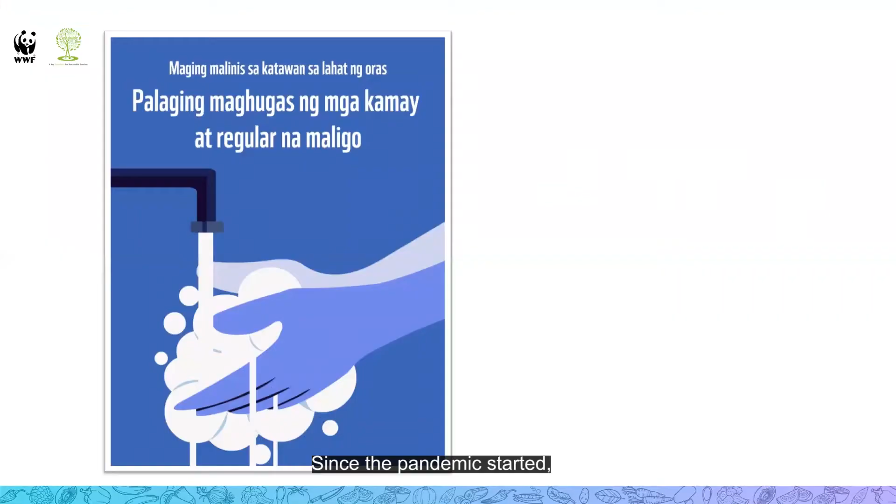Since the pandemic started, we've been receiving a lot of advice from our experts to keep washing our hands. And this is very important because it's our primary defense against spreading the disease, COVID-19.

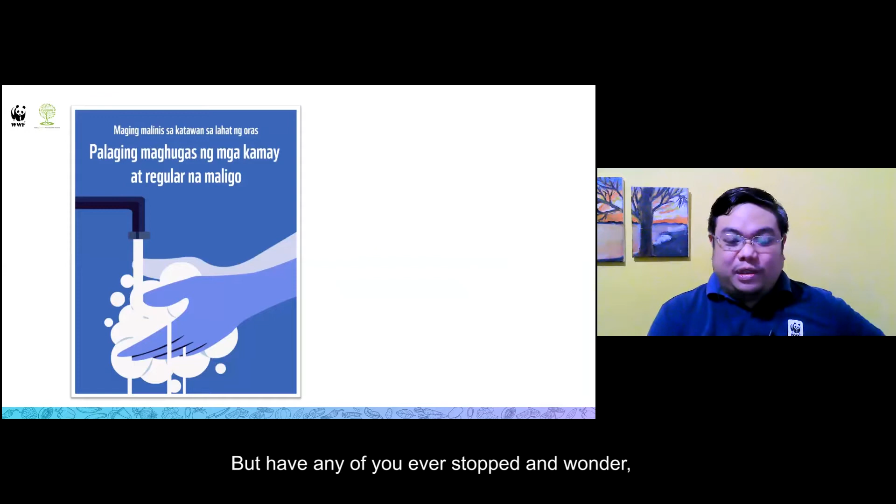But have any of you ever stopped and wondered how much water we're actually using in that 20 seconds of washing our hands? In an experiment at our house during the water crisis in 2018, I measured how much water we'll be using if we keep the water running as we lather our hands with soap as prescribed by our experts. Within 20 seconds, we could easily use up more than 1.5 liters of water, and that's water generally wasted while we're soaping our hands and just letting the faucet flow.

So that's how much water we use in 20 seconds. And take note that this was during the water crisis in Metro Manila in 2018, where we had a lot less pressure than what we used to have before the crisis.

But then again, have any of you ever wondered where the water is coming from? When we ask people in Metro Manila, they kept saying that they get their water from the faucet. Where do you get your water? It's gripo, it's a faucet.

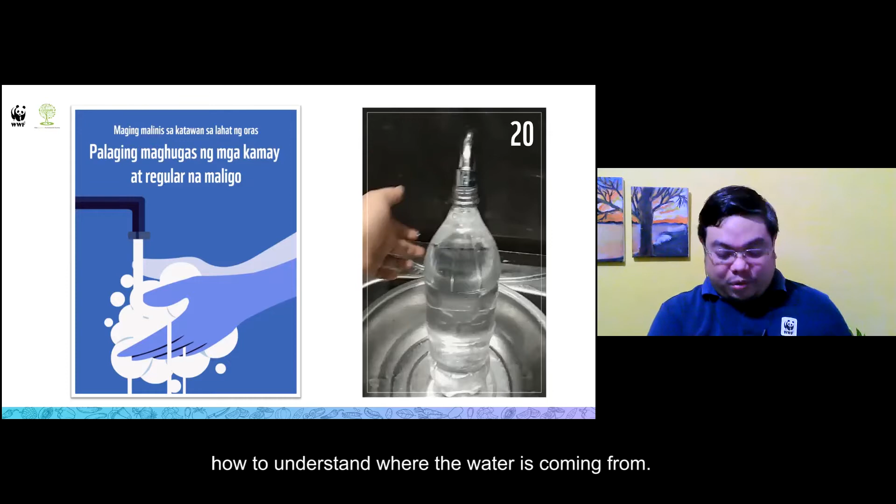And that's quite understandable for many people who live in the cities who don't really bother to understand where the water is coming from. But in general, water does not come from the faucet. In fact, it comes from somewhere way, way farther than the faucet.

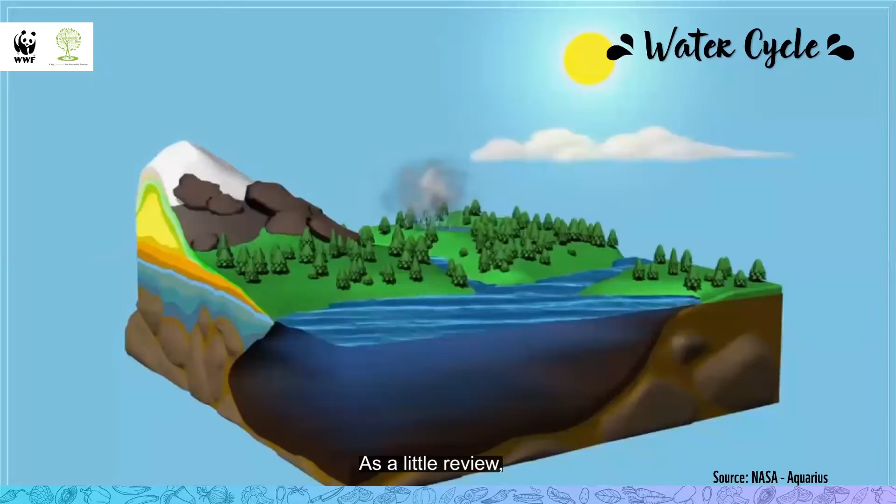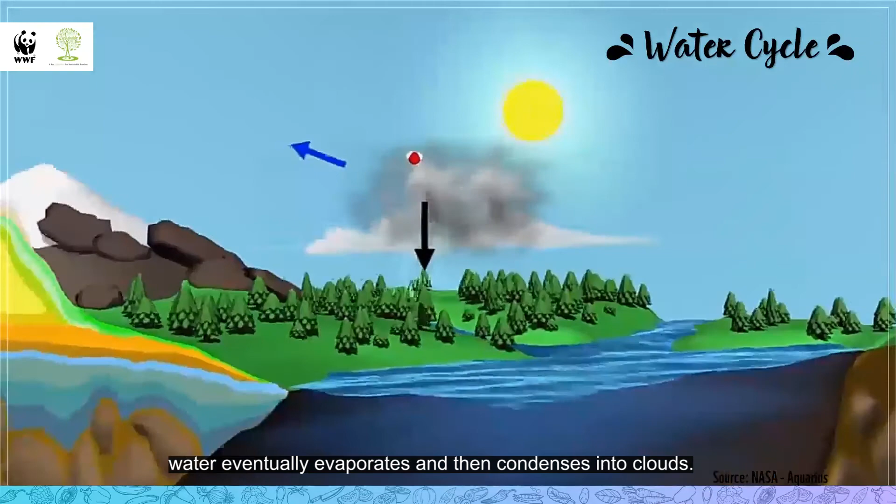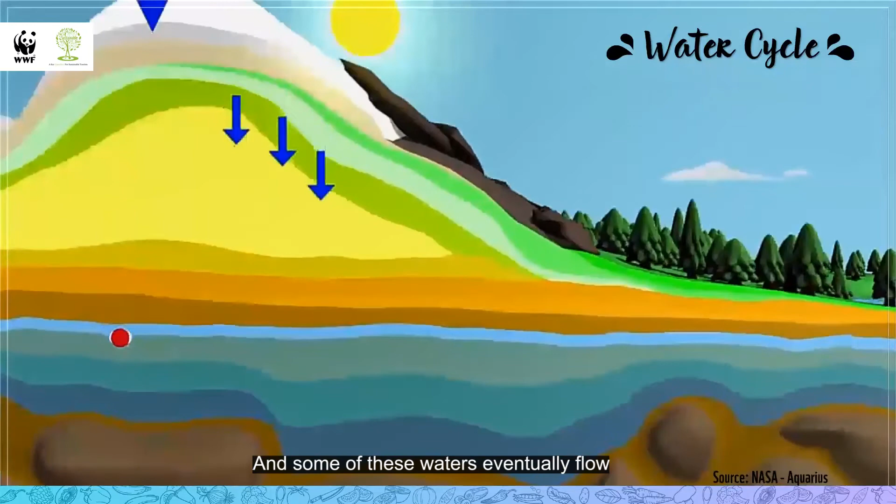As a little review, this is the water cycle as discussed by NASA. Because of the heat of the sun, which heats up our oceans and water bodies, water eventually evaporates and then condenses into clouds. As the clouds get heavier, they eventually fall back to Earth as snow, rain, or sleet. Some of this water eventually flows through the rocks and the soil and ends up underground in the water table, which becomes groundwater.

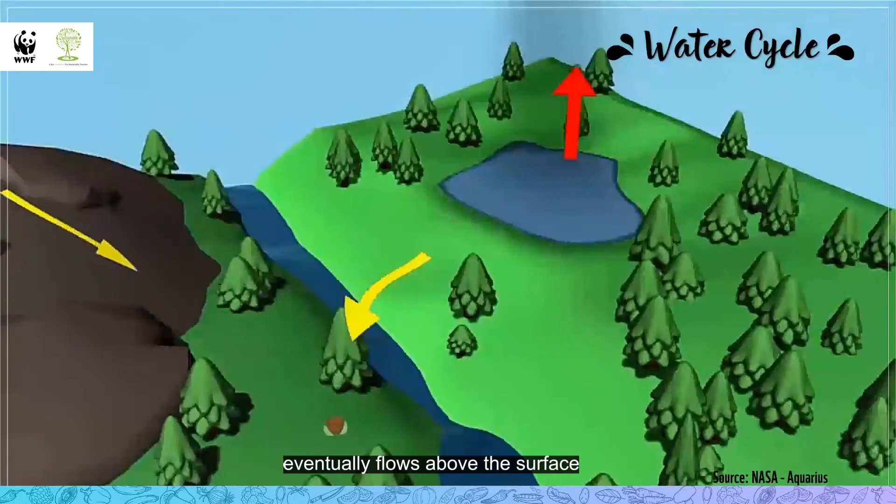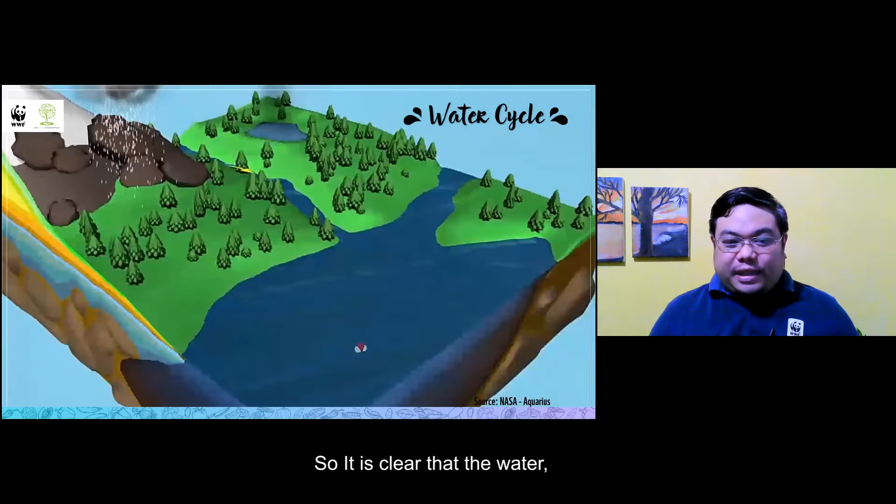But then again, some of the water eventually flows above the surface, which is then called surface water, collected in our lakes or rivers, which eventually flow back out into the sea again, completing the cycle. So it's clear that water in general is coming from nature because of the water cycle, and not just because of a faucet.

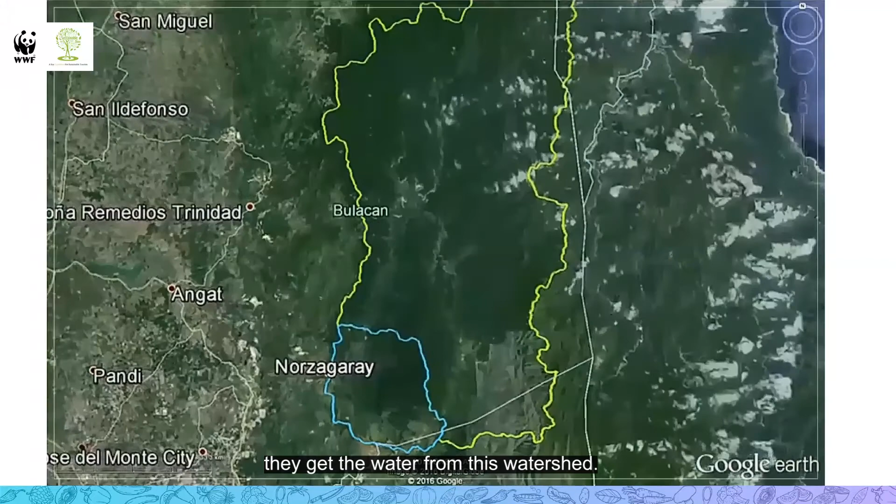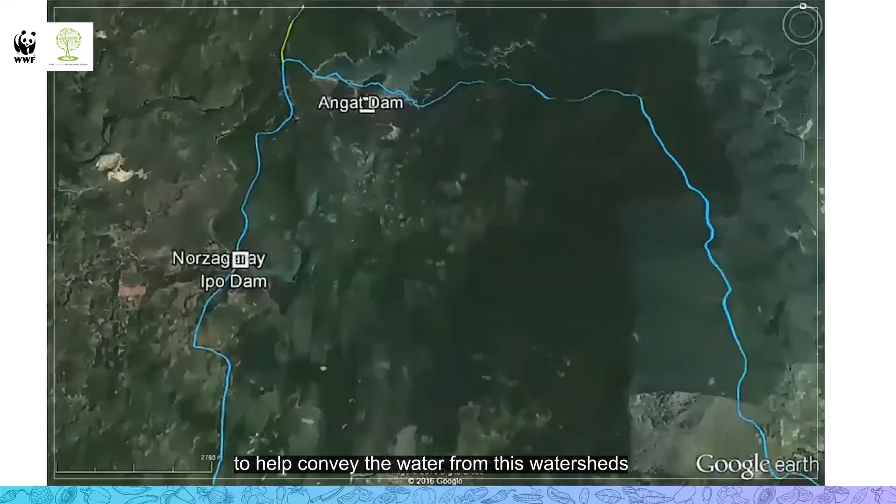More specifically, for Metro Manila, about 40 kilometers northeast of Metro Manila, they get the water from this watershed: the Angat and the Ipo Watershed. In the Ipo Watershed in particular are two dams which were created to help convey the water from these watersheds to where we need them the most.

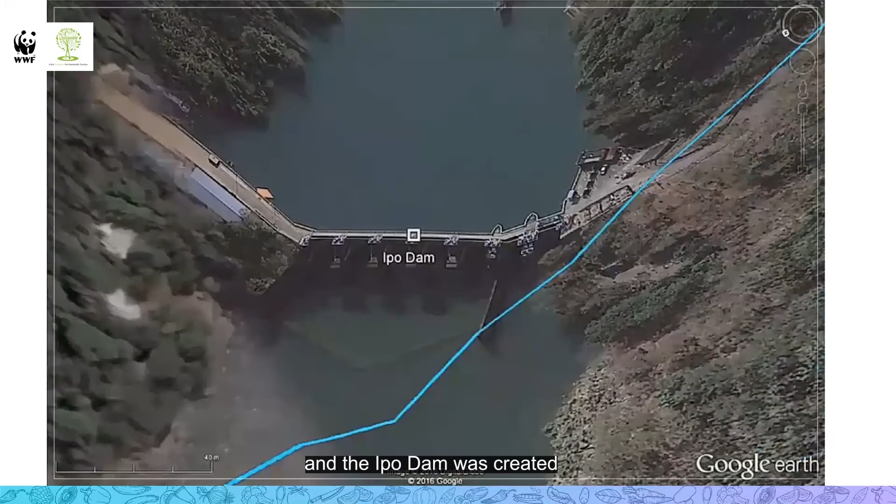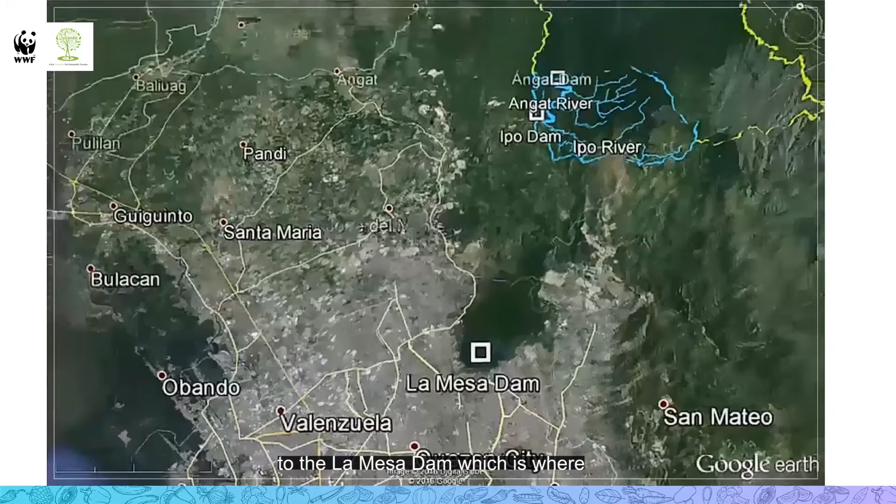The Angat Dam was created as a hydropower dam, and the Ipo Dam was created specifically to provide water for Metro Manila. Now Metro Manila gets 96% of its water from the Ipo Dam, which is then channeled to the La Mesa Dam, where our concessionaires, Manila Water and Maynilad, eventually distribute it to the population.

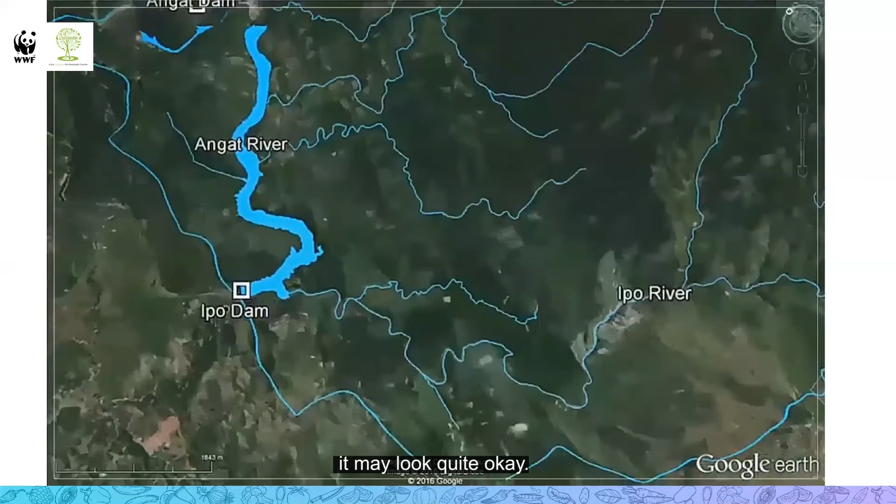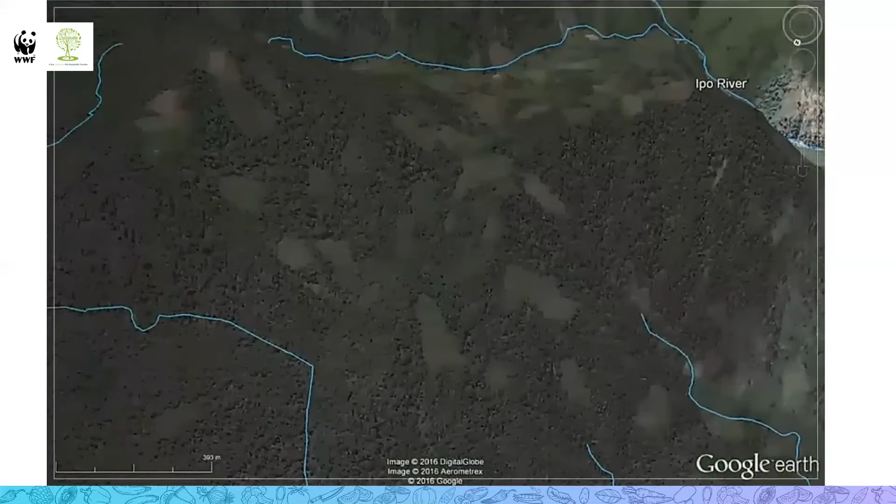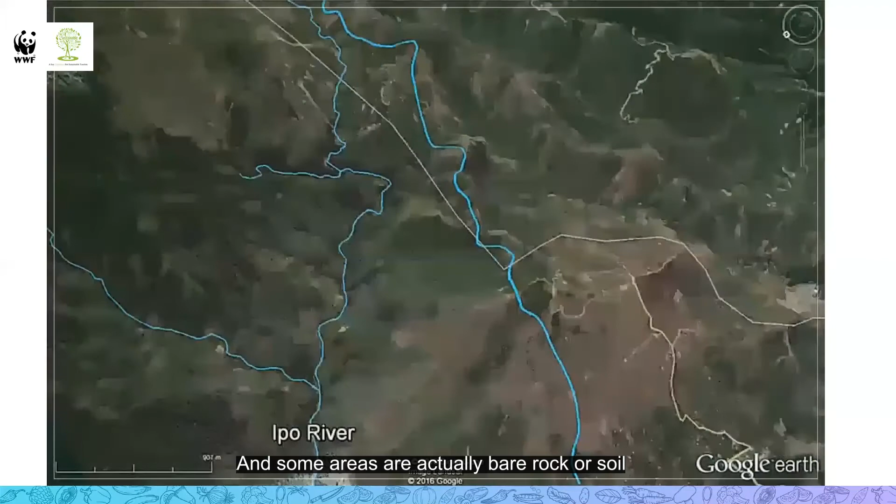So when you look at the Ipo watershed from a distance, it may look quite okay, it looks green. But when we go down to the site, we could see that a lot of the areas are not actually forests, but have been converted into farms. Some even have marks of previous illegal activities such as kaingin and other illegal timber poaching. And some areas are actually bare rock or soil because of years of overexploitation and degradation that has been going on in the watershed.

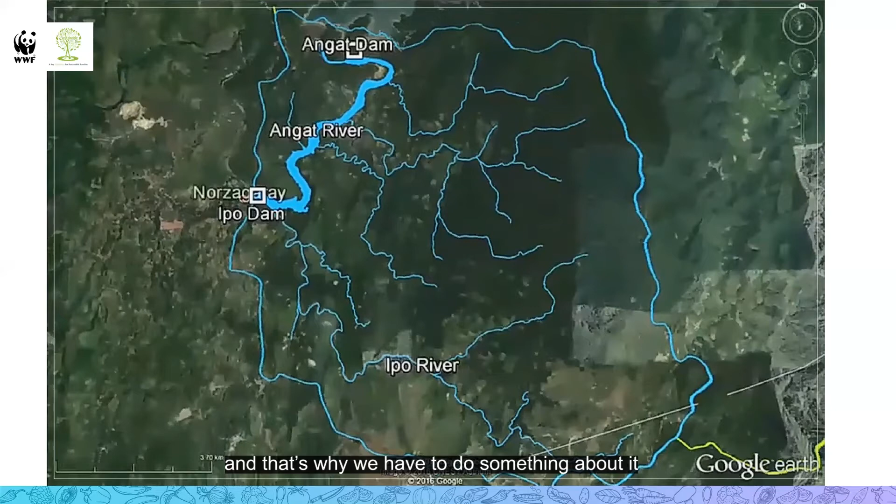So this is sort of a picture of the status of where our water comes from, and that's why we have to do something about it if we want water conveyed to where we are.

Now that we know that water actually comes from nature, we must also understand that it takes a lot for that water to be captured, eventually cleaned to our specific purposes. And take note that there's more than one use for water. Not all water needs to be potable or at a level that's safe for drinking. And then eventually it needs to be conveyed to where we need it the most.

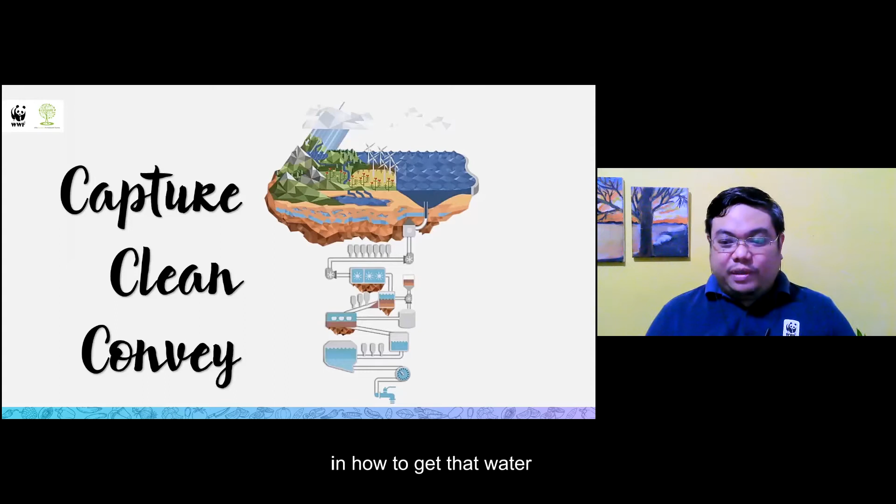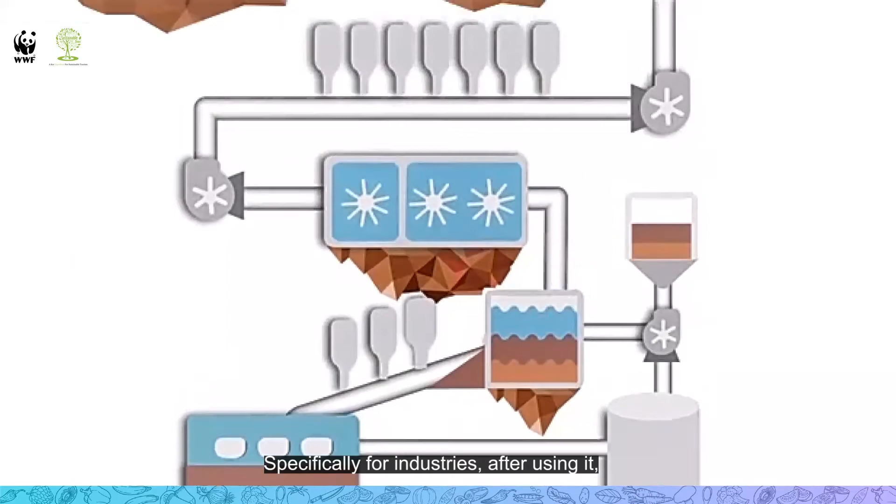This is why most people think that the faucet is the source of water, because every day when we turn on the faucet, we get the water. But we don't really think about the process involved in getting that water from nature to our faucets in our houses. And then again, after using it, we must always remember, specifically for industries, that after using it, it has to go through a similar process, maybe even a more intense process of cleaning before we put it back out into nature.

And this is the case for a lot of the tourism facilities, particularly in Boracay, where recently they were shut down due to the poor water quality in the area, which was basically mainly about most of the establishments not following this reverse process where you have to process the dirty water you use before you pump it out back into the sea or into the ground.

So when we talk about water management, we often just talk about the supply side. Oh no, we need more water. We have a crisis, we need more water. Sometimes these solutions will entail building large infrastructures that may hamper or do irreparable damage to the environment. And it's because we only focus on the supply side of the issue. But actually, we have to focus on both sides of the coin. It's both supply and demand.

So, in particular, at the height of the water crisis in Metro Manila, this was the average consumption for a typical middle class family in the eastern part of Metro Manila, which suffered the most at the 2019 water crisis in Metro Manila. And believe it or not, this is 200 liters.

Can you imagine that each individual in Metro Manila East Side, middle class and above, was using 200 liters per day per person? It may be hard to believe, but you can check your water bills if you're in Metro Manila. The average monthly consumption is about 30 cubic meters, so that's divided by 30 days, so that's 1 cubic meter per day.

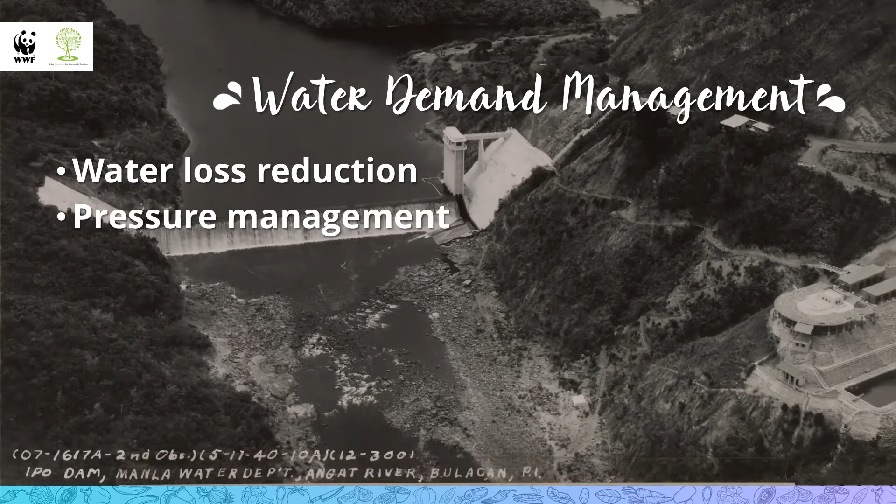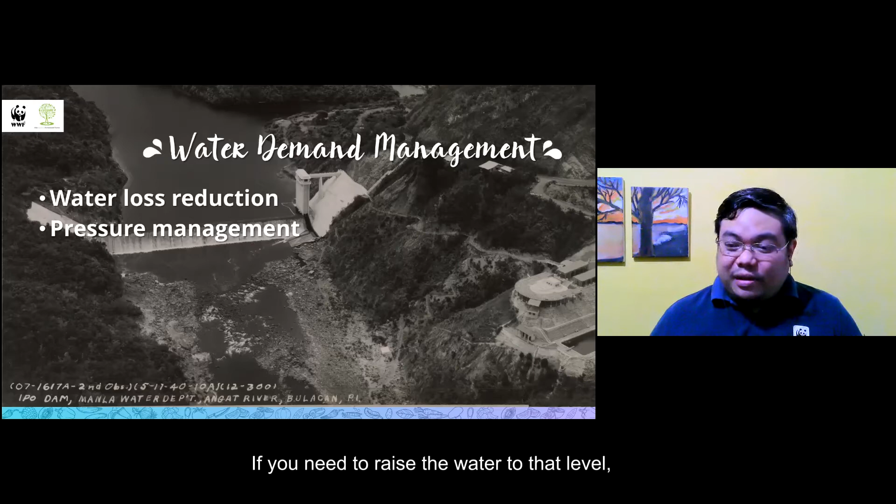The next is pressure management. The more pressure you use in the system, the more water flows out of that faucet per second. There are prescribed pressures for each system, but sanitation-wise, you have to maintain a certain pressure so you can avoid contaminants from entering the pipes in case there are leakages. This is dictated by law or by governing bodies in the area. But essentially, we don't need water from our system to reach the third or fourth floor without any additional pumping mechanism involved. If you need to raise the water to that level, you need a separate system pumping the water up and not rely on the general water system from the utility.

The next is water reuse. This is very simple: as much as possible, the water we use for some functions is reused for other purposes that do not require a very high water quality. For example, we can use it to water our green areas for irrigation.

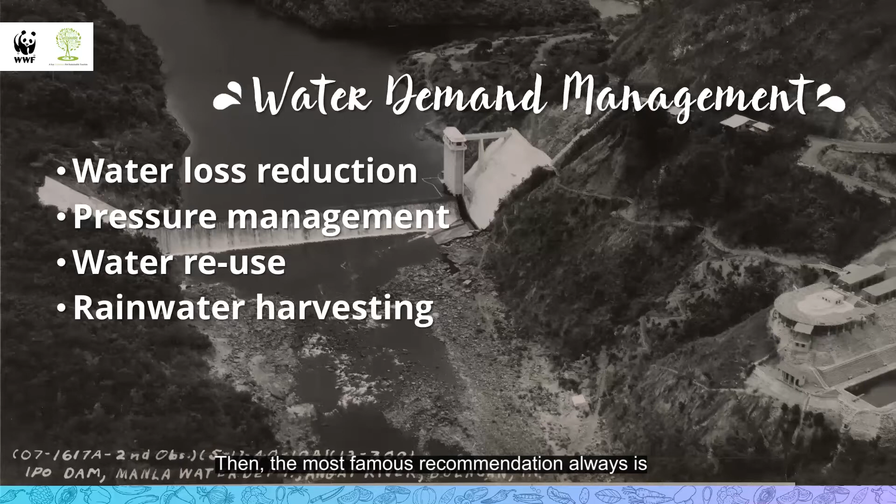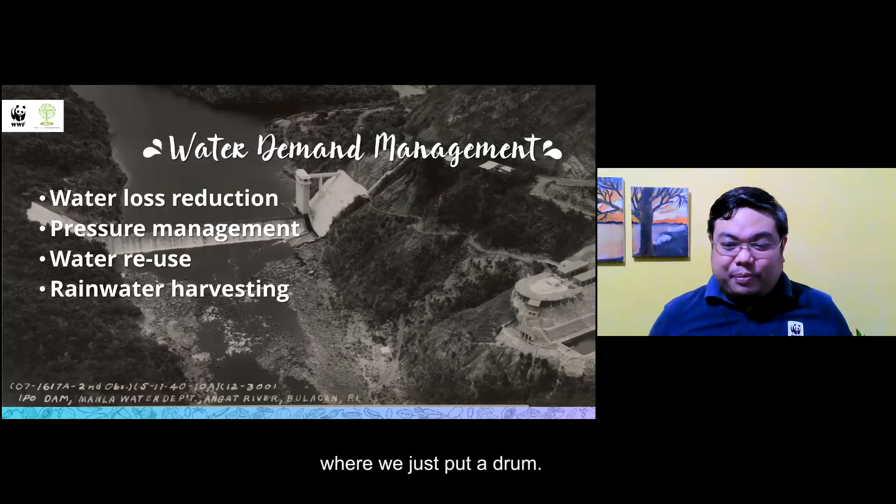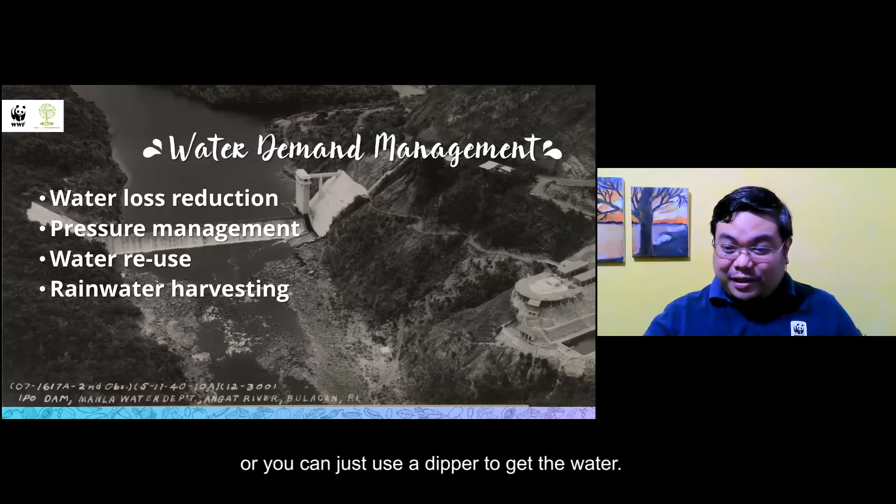Then the most famous recommendation is rainwater harvesting. It's free, and it's very cheap to integrate into a system. We even have a program working with public schools where we just put a drum, connect it to the gutter system of the building, put a cover, and add a faucet or even just a dipper to get the water. This can augment the water supply of the area, but it would depend on the size of your roof and the amount of water you're using in the facility. So this is more of an augmentation rather than a complete replacement.

The next is water efficient fixtures. I'll go into this a bit more later.

Then there's also water conservation. This is the part where we ask people to catch all the water they use for shampooing their hair, and then later use it to flush the toilet, or the water from the washing machine can be used to clean the car. These are some tips on how to conserve water. We've been talking about this a lot, but we have to figure out how much of that water is actually being saved in the long run.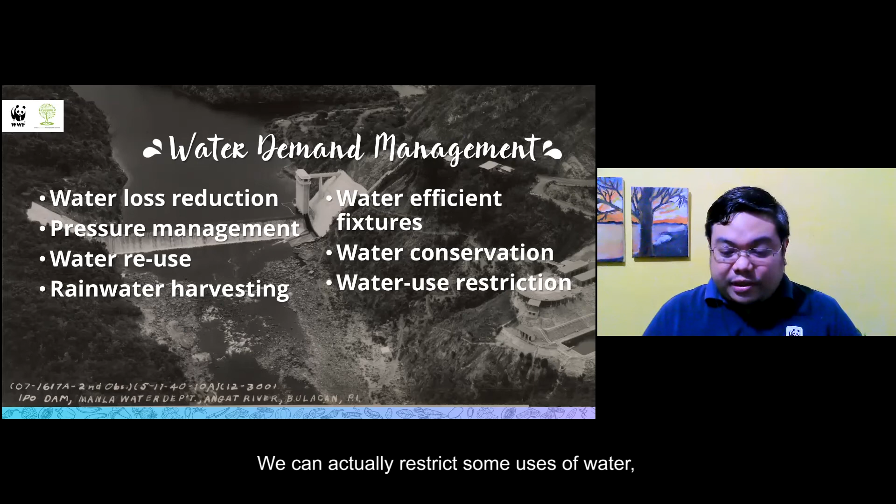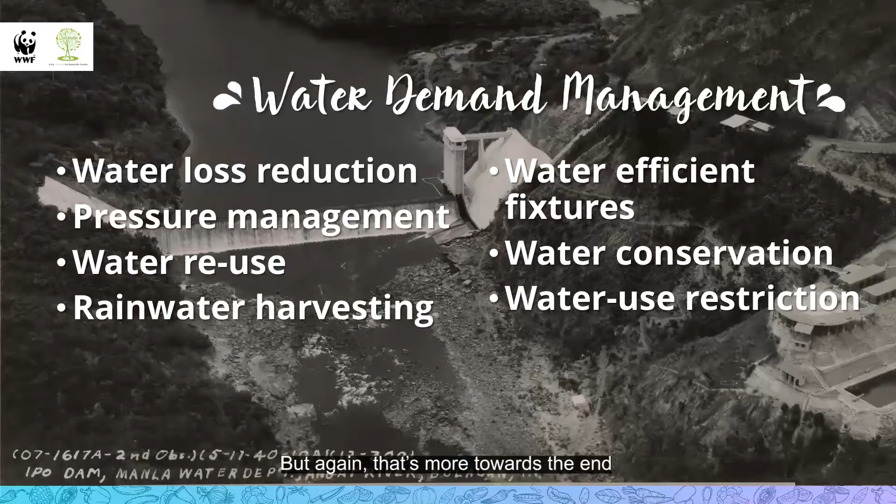Then we go to the last one, maybe the least popular: water use restriction. We can restrict some uses of water, specifically in areas where water is very scarce. For example, if there's a water crisis or the area is water stressed, maybe we can ban certain uses. Common examples from our discussions are swimming pools and golf courses in water stressed areas, so we can restrict those. But that's more towards the end of the spectrum of what we need to do on the side of water demand management.

For the tourism industry, one of the simplest recommendations for water use restriction related to water efficient fixtures is simply to avoid putting in a bathtub. I know a bathtub is required to get a 5-star rating, and a lot of people like having bathtubs or jacuzzis, but if you're in a water-stressed area, that's not really a reasonable facility because it wastes a lot of water. These are things that can be restricted depending on your assessment of your needs in the area.

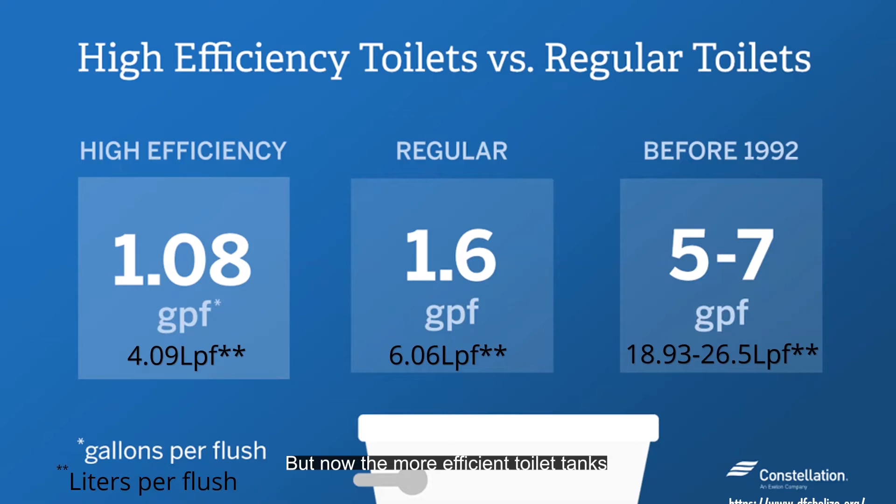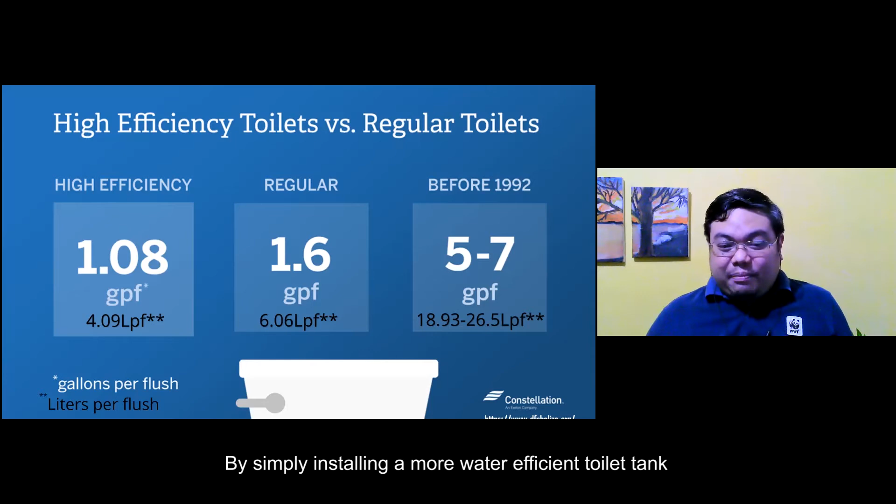If you're as old as me, we used to have the very big toilet tanks, wider than my shoulders, using about 18 liters per flush. But since 1992, we've had smaller versions down to 6 liters. Now, the more efficient toilet tanks can be about 4 liters per flush. So imagine, without changing the habit, each of your clients still pushes the plunger, but now they'll be using practically 1/5 the water by simply installing a more water efficient toilet tank or unit.

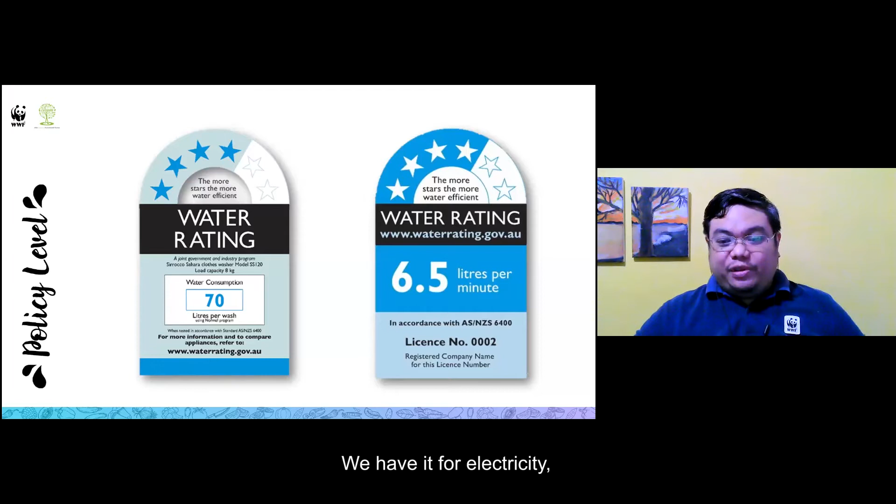Another tip is choosing better brands with better water efficiency. Unfortunately, in the Philippines, we don't have a system for rating how water-efficient an appliance is. We have it for electricity, called the EER, Energy Efficiency Rating, and we know the bigger the number, the better the savings. We may spend more initially, but save a lot more down the line because it uses less electricity. The funny thing is, when we buy a washing machine, we still look at the EER, but we don't look at the water rating.

How many liters of water is used per wash, per load of that washing machine? Or how about this faucet or shower head? How many liters flow out per minute? These are some simple changes you can make in choosing fixtures for your house or facility with regards to water. There's a group pushing for this now. But even without the rating, you can check online, because the same water fixtures we use here are sold in other countries that do require water ratings, so you can compare and choose the better product.

And now there's an even simpler solution where you can just install a nozzle which, depending on the model or design, can cut water usage by 98%. This is just a nozzle you can fit into your faucets, requiring very little infrastructure. You just plug it in, as long as it's compatible. By just adding this little attachment, you can save up to 98% of water, because we don't need the big flushing water in the first place.

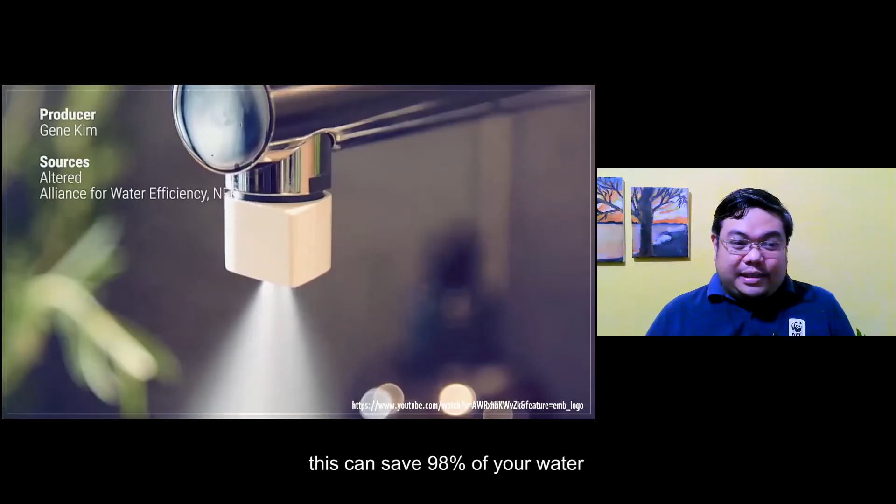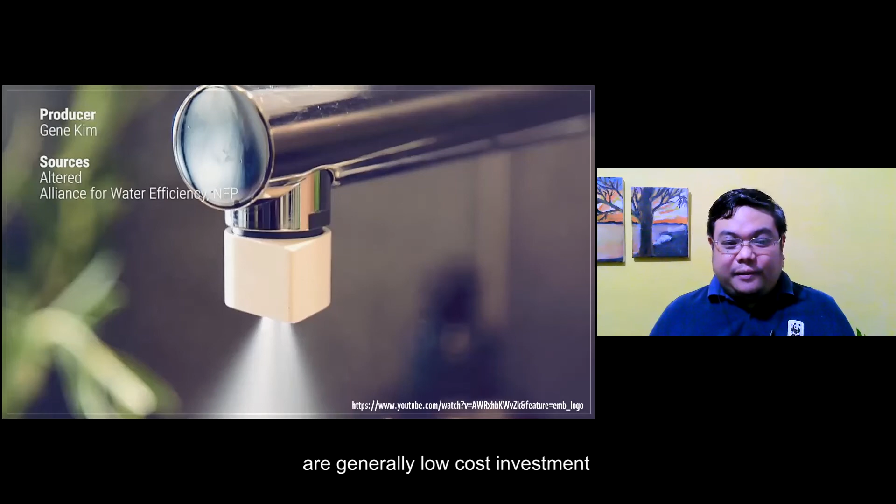This mode is free flowing, but when you use it in this mode, the water is actually sprayed or atomized and spread over a larger area, so you can use less water without changing the user's habit much. Unfortunately, this particular design isn't yet available here and is quite expensive. But if you compute it down the line, it can save 98% of your water from the faucet just by installing this small device. I'm not promoting this particular design, but these flow restrictors and atomizers that spread water over a larger area are generally low-cost investments for your kitchen, and are actually better for washing dishes because they cover a larger surface area.

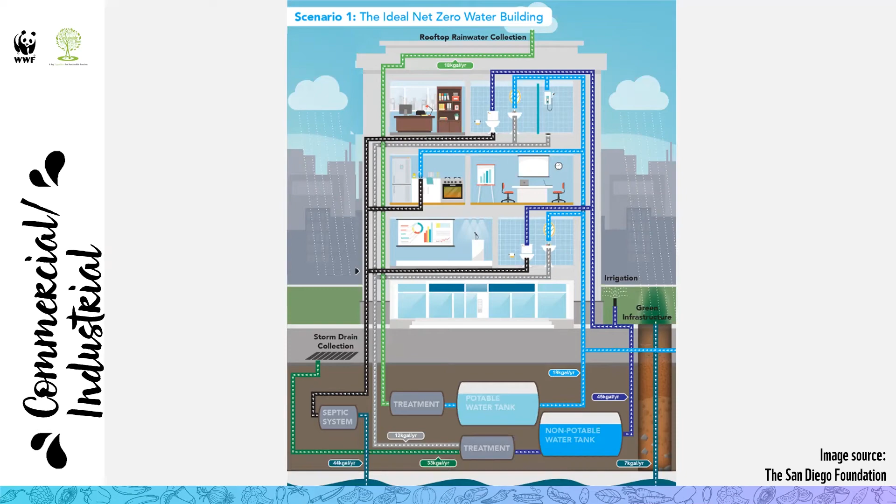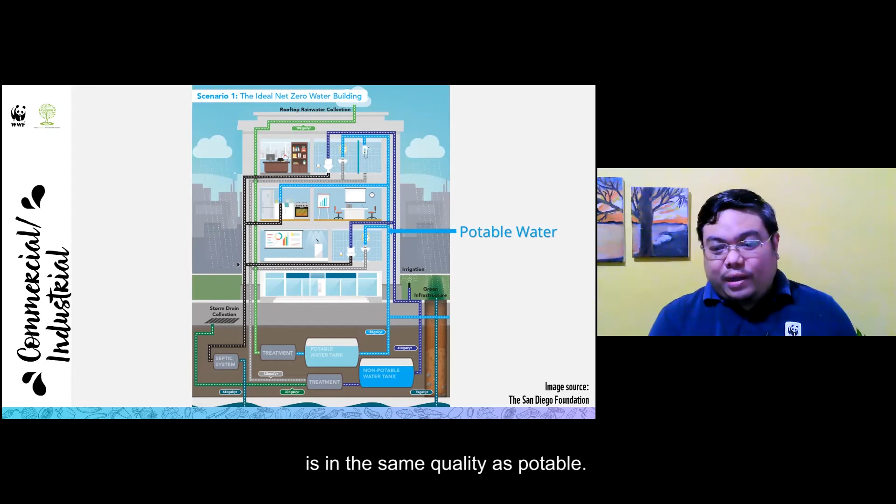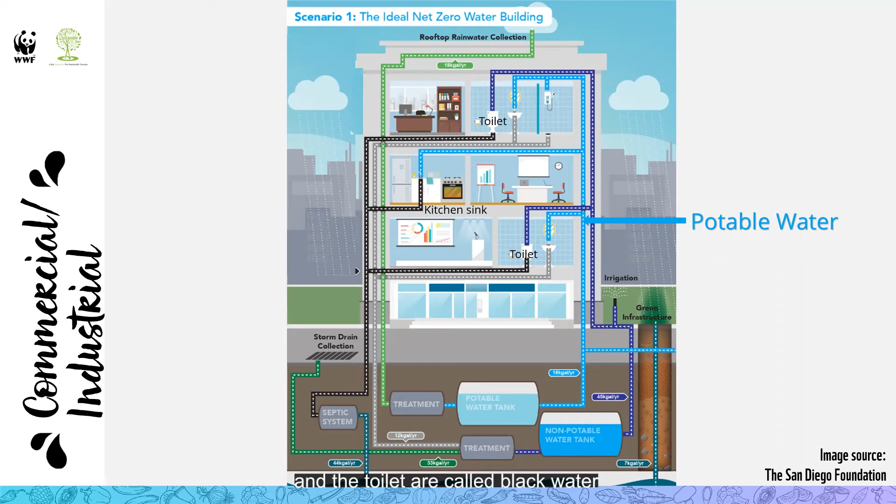If you're still building your facility, it's a good idea to install green infrastructure, because in general, all our water from the water supply utility is the same quality, which is potable. You can drink it from the faucet by law. But some uses, like the toilet, do not actually require potable water. The water from systems like the kitchen sink and toilet is called black water, which by law should be treated in a septic tank that complies with legal requirements before it's recharged or pumped back into nature.

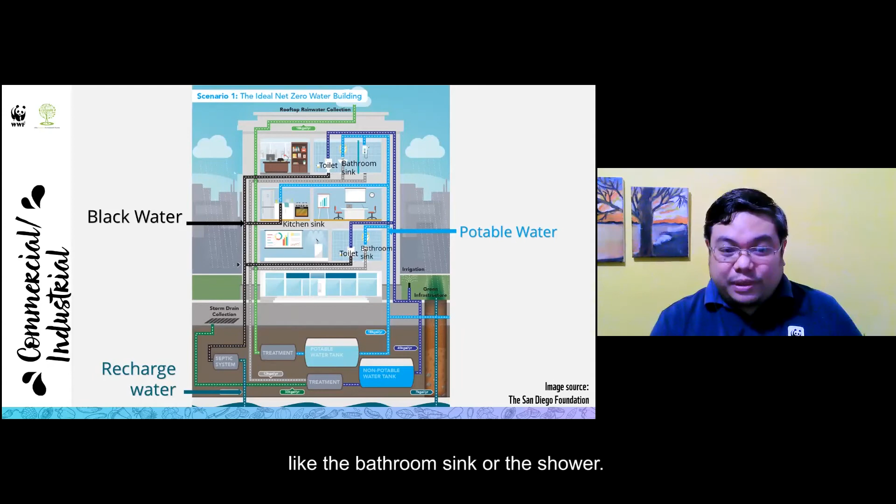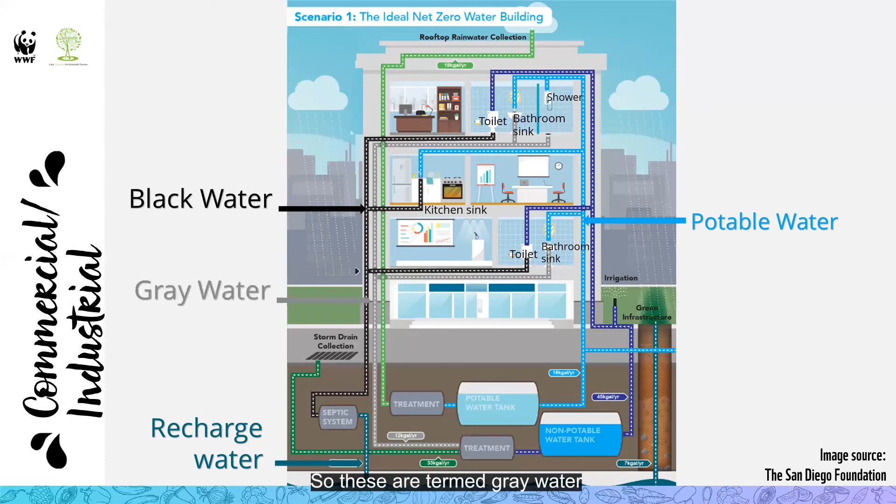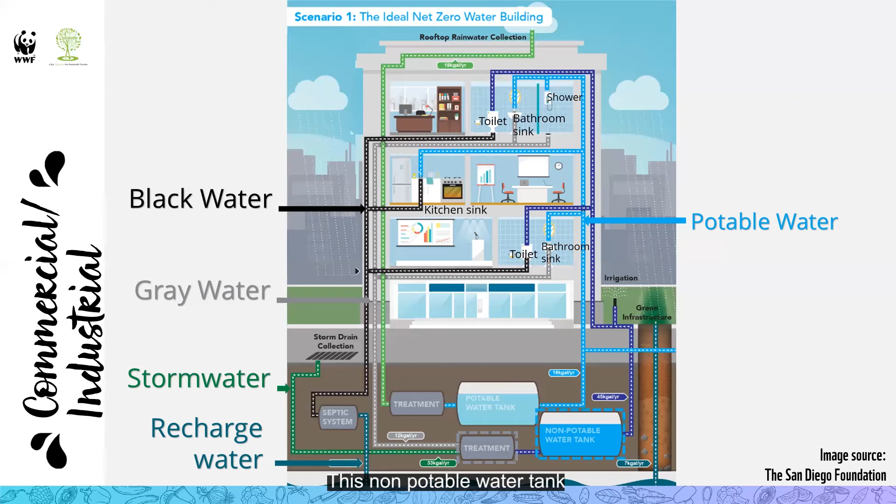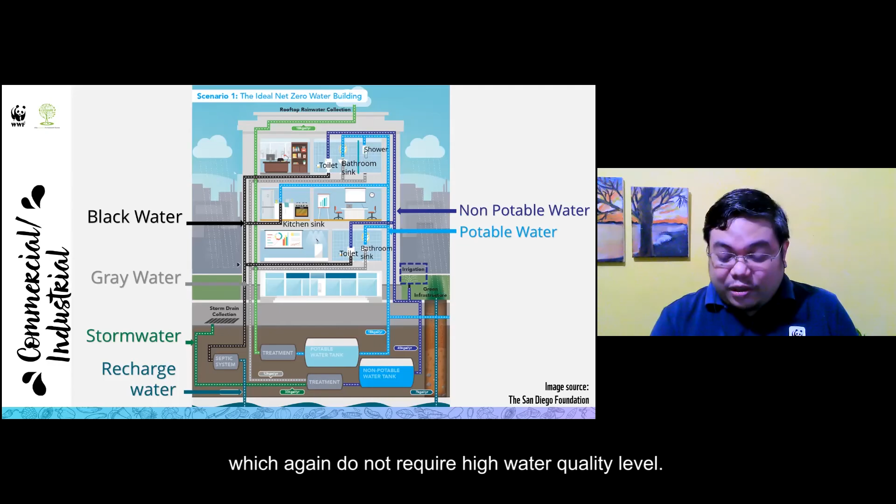But some uses, like the bathroom sink or shower, produce water that isn't generally as dirty as that from the toilet and kitchen sink. This is termed gray water. Gray water, along with storm water collected from our drainage systems, can be collected in an underground tank or facility, and with very little treatment can be filtered into non-potable water. This non-potable water tank can then be used to irrigate green areas, and also to flush toilets, which don't require potable water quality. So we save potable water by reusing the filtered water, which isn't safe for drinking. This is called dual piping.

It's quite difficult for facilities that have already been built, but if you're just starting to build your facility, it would be very useful to have this kind of system with separate gray water and potable water systems.

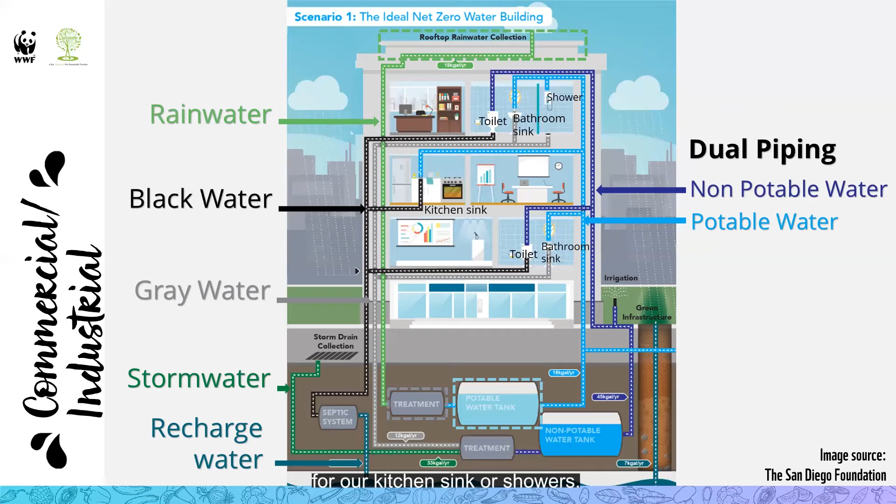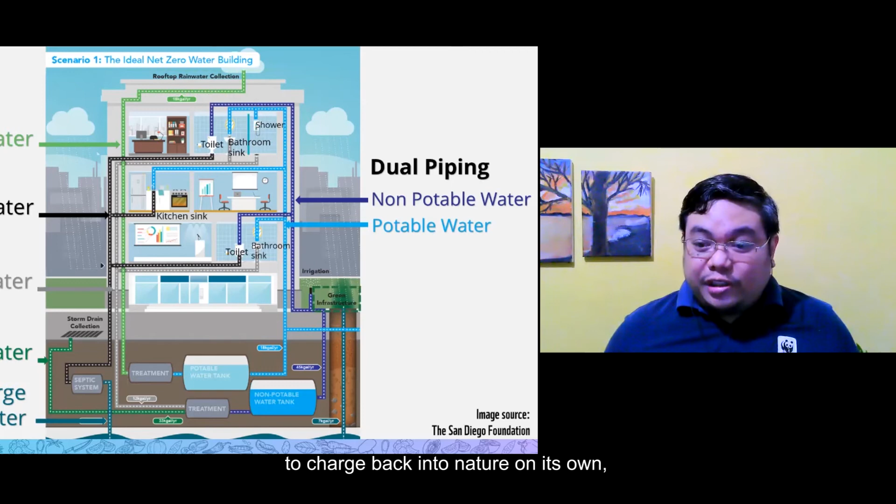We could also collect rainwater from our roofs and then funnel it down to a separate tank. With very little treatment, we can filter that back as potable water, because rainwater is generally a lot cleaner. This line can then be used again for our kitchen sink or shower, or other purposes that might require potable water.

It's also ideal to have green infrastructure within your facilities where water is allowed to recharge back into nature on its own, as long as it's just rainwater or water from your lawn. This is an example of an ideal net zero water building, and it's actually incorporated in our green building code. But it's not mandatory for all new buildings, only those of a certain size. This is something you'd want to keep in mind when building your facility. You can even do it retroactively, but it might cost more to install dual pipings in a built-up facility.

When we talk about water management, what we're actually trying to manage are the risks associated with water. Most of you are familiar with physical risk—the risk of not having enough water, not having enough clean water, or having too much water in the case of flooding.

But oftentimes we do not talk about regulatory risk, which was what happened to Boracay. You had water, but regulations stopped you. No matter if you were a model facility in Boracay, not everybody was playing by the same rules, so everybody was shut down. This is hardly talked about in many industries, particularly the tourism industry, but regulatory water risk is really something you should consider.

There's also reputational risk, similar to what happened to Boracay. Fortunately, the cesspool tag didn't stick. But imagine if you were a water company and there was a rumor going around that your water has cockroaches or something—that could affect the reputation of your company or facility. These are some of the things we need to talk about regarding water management.